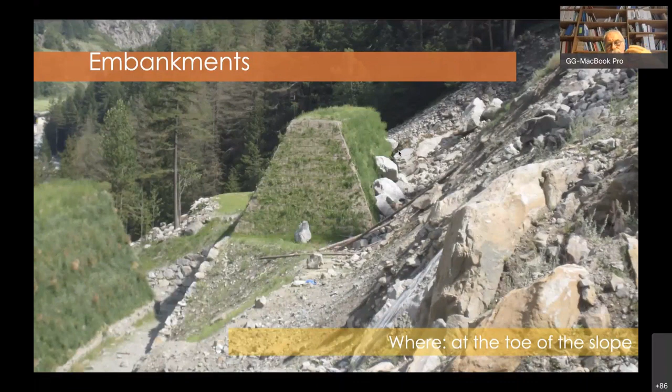A similar solution to the rockfall barriers are the embankments. They are installed as well on the bottom of the slope, far away from the detachment area. But the solution is the same, and the calculation approach is more or less the same.

After that, we have another family, another group of solutions, which is the simple drapery — that is a mesh applied on the slope without anchors. Anchors are applied only at the top. So the main components in this case are the drapery, the top longitudinal rope, and the top anchors. These are the main components. After that, we can insert some intermediate rope, or at the bottom another rope, and so on.

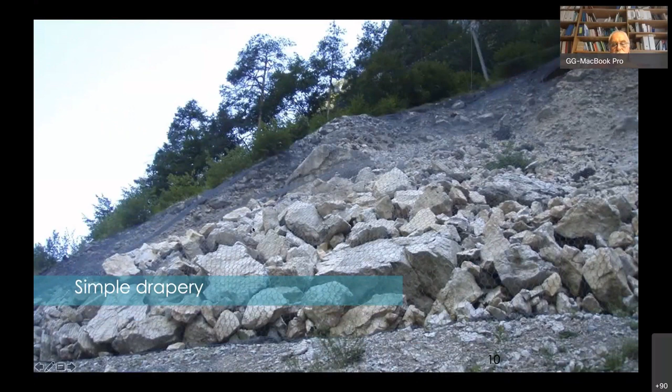But obviously, we can apply this type of intervention on the detachment area — let me say, mainly on the detachment area. Sometimes we can apply it also in a different position, for instance where there is the run-out zone with a lot of debris. This is an example of simple drapery. As you can see, it is quite an effective solution, fit to catch debris of large size. Some blocks in this slide have a diameter close to 1 meter.

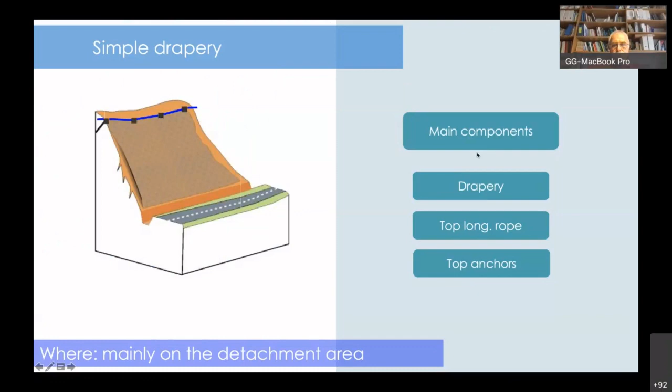But most frequently they are used for small blocks. Moreover, we have secured drapery. What is the secured drapery? It is like the simple drapery plus a pattern of anchors which stabilize the slope in cooperation with the mesh. So the main components are meshes, anchors, and cable netting. This type of installation is done on the detachment area and can typically be used on a rock face, but also on a steep soil slope, like soil nailing.

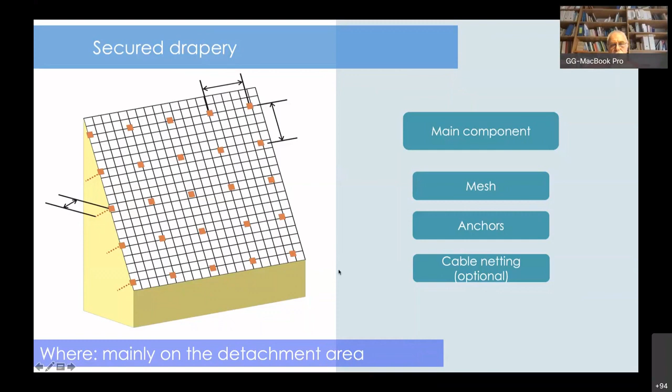We will see which are the main steps for the calculation, without going into the problem deeply. This is the typical installation. As you can see, we have the mesh, the raster of anchors, and additionally in this picture we see there is the cable netting overlapped on the mesh. This cable netting is very useful, really helps the effectiveness of the intervention, because it keeps down the mesh and distributes the forces, transferring the forces from the mesh to the anchors.

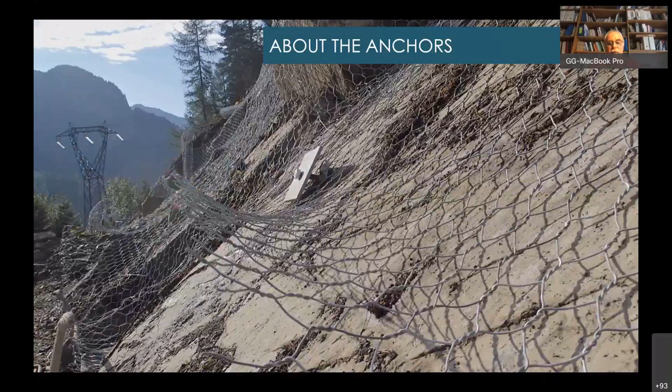But we have the opportunity to speak in a better way now. Second issue: on the detachment area, now we go deep on the meshes. I won't go too deep because it is quite long, but just an overview. We have meshes and anchors all together. Meshes and anchors means they have to cooperate, and this is a problem — we have to understand how to calculate this type of cooperation.

First, we have to say which type of anchors we are using. Typically, on the rock face are used tie-back anchors, like this one — bolts, or nails, dowels, anchors. The name could be different. But anyway, which is the difference between these?

The tie-back anchors transfer the forces from the head down to the foundation. This segment is free and transfers the forces from head to down. The same is true for bolts, but the foundation is very small, and the foundation can be slightly tightened, and after that the bolt can be grouted.

Usually in the rock face, for the intervention we do for practical reasons, and let me say also for effectiveness of the solution, we use this type of intervention. Here we have the head with the plate, but the foundation is continuous. The steel bar is grouted for its entire length. So in this case we cannot pre-stress the anchor, and this means this is a totally passive solution.

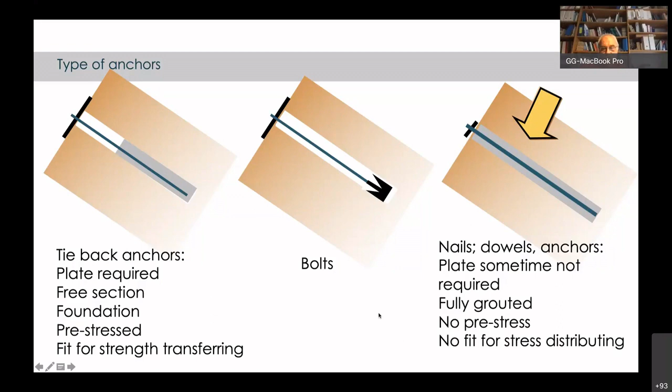Here we have an active solution on the tie-back and bolts. We have active because they develop force before the displacement takes place. In this case, no - the displacement takes place, and after that the nail can develop a force as a reaction. This definition is typically taken from the Bible of rock mechanics, from Hoek and Bray, that says the anchors cannot be tensioned, and hence must be installed before significant deformation of the rock mass has taken place.

So, I repeat, we are working with totally passive intervention. What does it mean, passive? It means that even if we, in a certain way, pre-stress the anchor - that is, we screw down the nut on the plate - we don't develop this type of pressure. It's impossible. Basically, we do a short circuit of the forces, and no pressure is developed on the sliding plane.

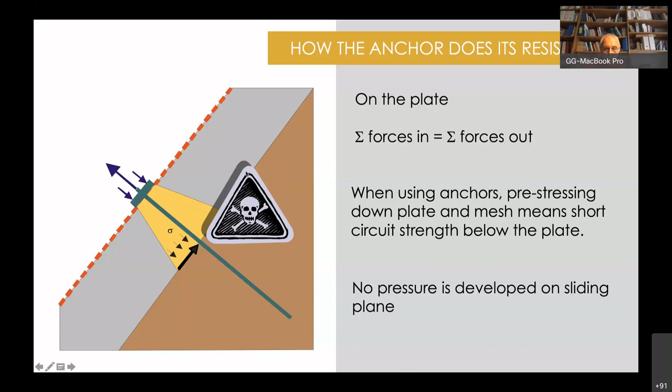What type of anchors are used? There are a lot of anchors on the market, but the most important feature is they are corrugated. Don't use a smooth surface if you have to do some work. Why? Because they don't have significant resistance to the pull-out stress.

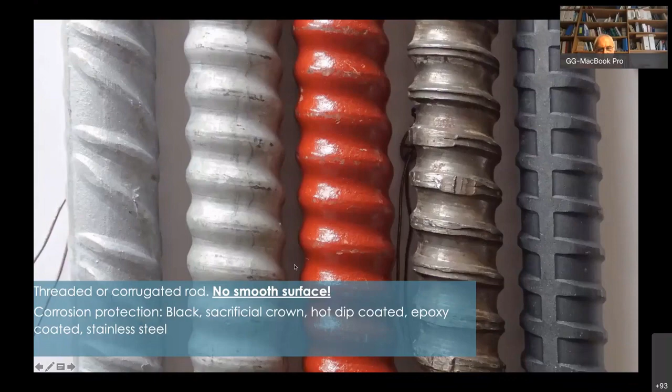Concerning the shape of the section, we have solid bar, and also in this case hollow bar. Usually this type of hollow bar is used for soil nailing operations, not in rock, even if they can be used also in rock, but usually we use solid bar.

The calculation of the solid bar is done considering also a crown of corrosion - let's say 2 millimeters - just to take into account that there will be, in the lifetime of the bar, a reduction of its resistance on the tracts where there is water circulation.

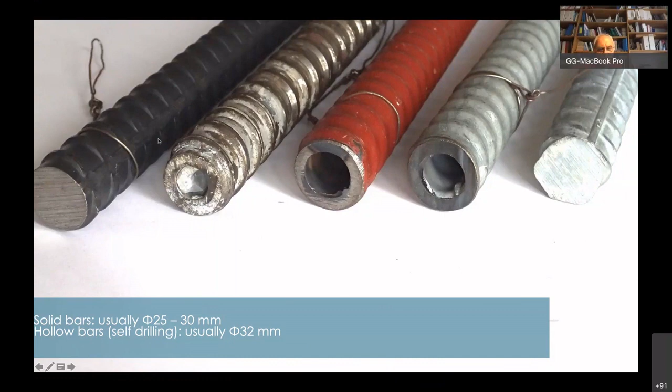In which way is the grouting done? The grouting is done directly by means of a pipe that reaches the bottom of the hole, and the grout rises into the hole up to the mouth of the hole.

Usually the grout is made with cement and water. The ratio between cement and water is, more or less in weight, 0.5. There are also some additives to increase the resistance of the cement and prevent shrinkage of the grout. Resin can also be used.

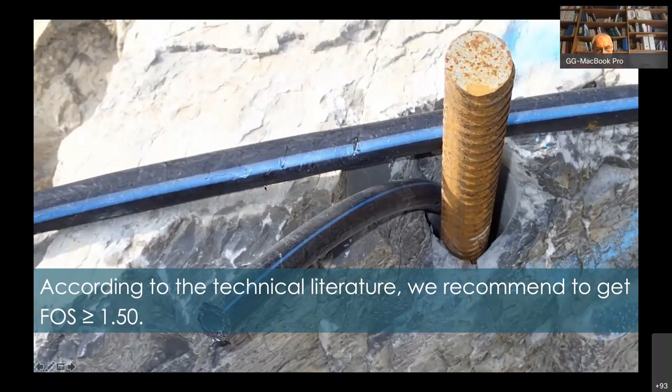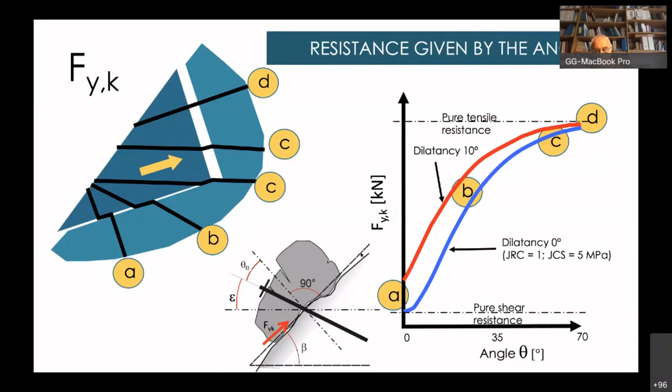Meshes. We have several types of meshes. We know that the meshes have to catch what is moving among the raster of anchors.

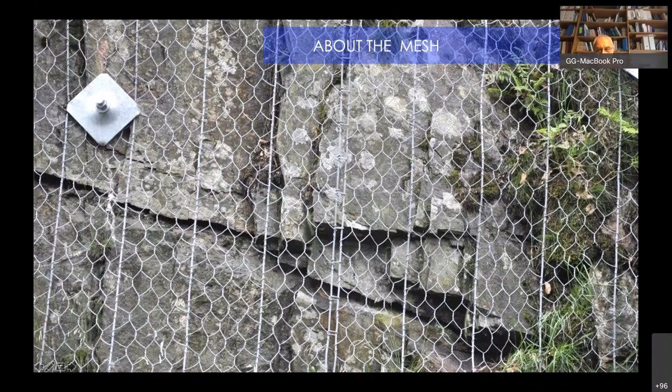We have to watch what really happens in the field. In the field, we see that even if we put the mesh in contact with the ground, on the surface, there will always be space between the plane of the mesh and the surface. Moreover, we can easily lift the mesh, even if it is a very strong mesh. There is no problem lifting it.

That is what experience says, and physics also says, that the mesh, being a membrane applied on the ground surface, can only develop tangential forces. No force can be developed by the mesh perpendicularly to the ground surface.

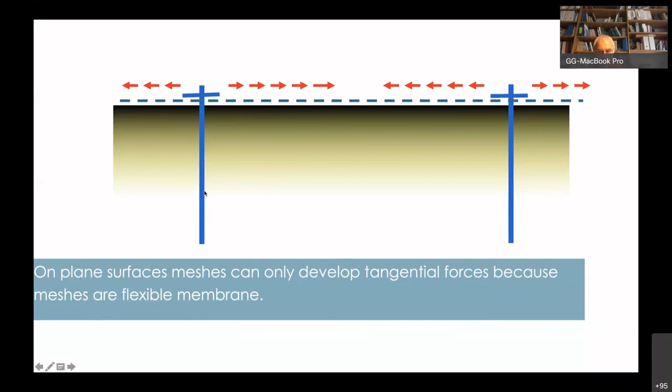In other terms, if we put the anchor down in a depression, in a concavity of the ground, we can create a sort of dome, which from the theoretical point of view can develop forces at pressure.

But in reality, what happens? Because we have a very large deformability of the mesh, this force will be negligible, absolutely negligible. And if you go to this position and try to lift the mesh with your hands, you can do it. You can lift it.

How can we know the properties of the meshes? With tests. Basically, there is the UNI test, an Italian standard, and also the ISO test, another standard. These ISO and UNI tests are equivalent.

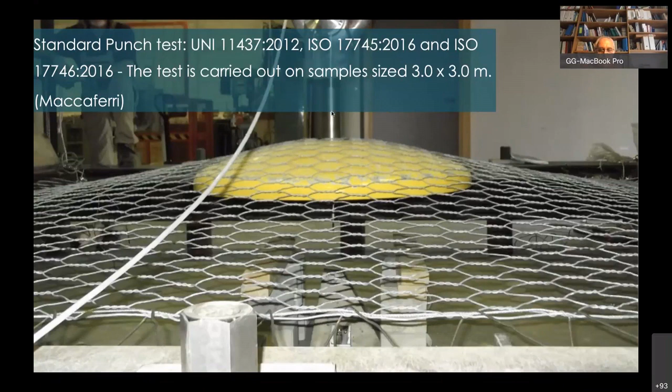And the test is done moving the shield, which has a diameter of 1.5 meter - in this case it is a small one, but according to the standard it is 1.5 meter. The test moves the shield with a velocity of 2 mm per second.

After that, another important property of the mesh is the tensile resistance. There are several standards for this type of test: standard UNI as well as ISO, which are quite similar.

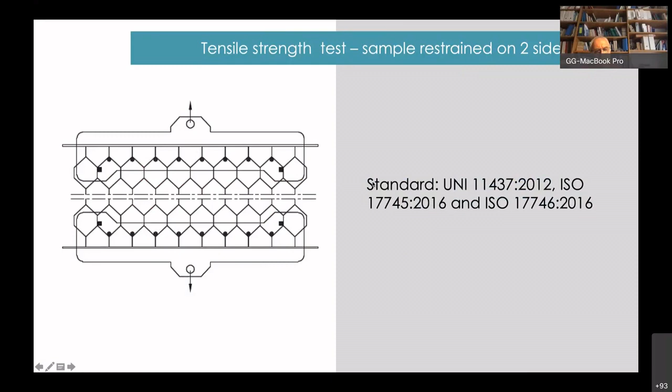Which is the tensile resistance? I won't go deeply into this matter, but it could be very interesting to understand the procedure of testing in order to also understand the limit of each test.

Anyway, we see the range of meshes going from, basically, this double twist reinforced with cable has a resistance of 60 kilonewton per meter - this is wrong, it's missing the meter unit.

And HR30 with cable, where the reinforcing cables are inserted every 30 centimeters. The tensile resistance is 177, almost 180 kilonewton per linear meter.

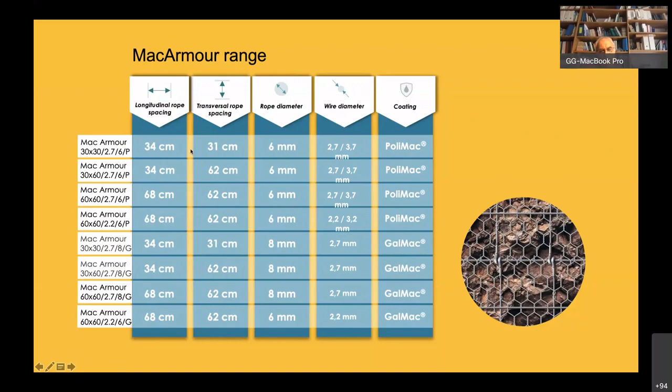Which is the logic we have to use to calculate the cooperation between anchors and mesh? This is the question. Now, the logic is that we should use a finite element method analysis because we have different types of objects that cooperate together. But the use of this approach is basically nonsense on the slope, because we don't have time to develop the calculation, we don't have enough information. Many times we are forced to develop in an emergency situation a quick solution. So we have to use limit equilibrium, or analytical method.

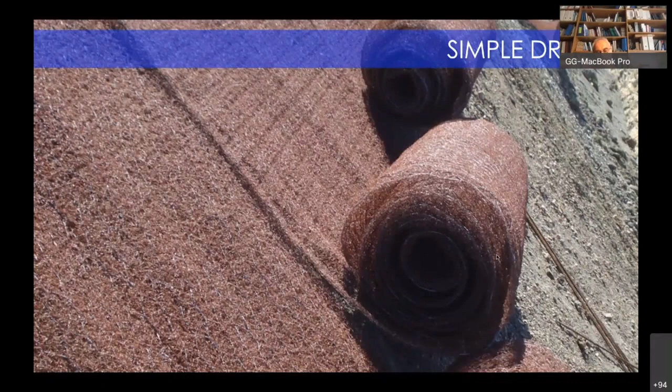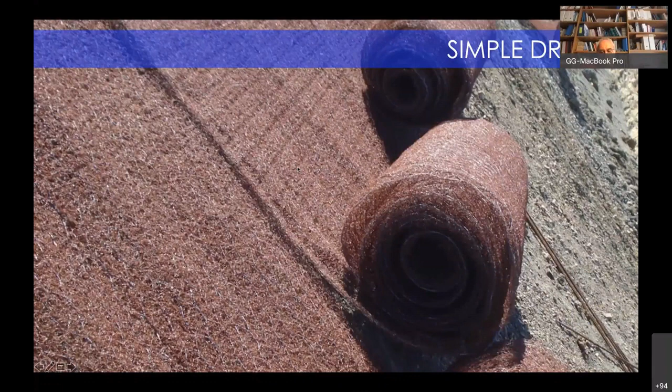So they have different purposes, the whole slope anchors, and the small portion, the mesh. With this approach, we can understand the forces against the mesh, and the forces against the anchor, and after that combine the two forces, taking into account the resistance that we know on the basis of the lab test. In order to explain all the steps of this calculation, it would take, I'd say, some hours, and we cannot go deeply into the matter. After that, we go very quickly over the simple drapery.

Simple drapery means, as we have seen, mesh applied on the slope. In this case it's a mesh plus mat, anti-erosion mat. The calculation principle is this: we have the mesh on the slope, and the mesh keeps stabilized at the bottom a portion of debris. So the anchor on top has to keep the weight developed by the mesh itself and the pocket of debris at the bottom.

Plus, if there is the condition, I think in some places in the Himalaya, there is also snow, a layer of snow. And so at the end, the anchors have to hold and stabilize all these portions, and the mesh also has to withstand these forces: load of debris plus load of snow plus weight of the mesh itself. The tensile resistance of the mesh must be greater than these loads. This is the principle of calculation.

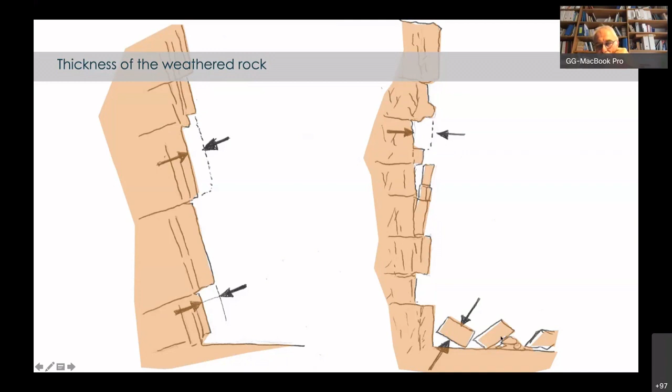Some cases just to understand: here we have a thin layered limestone slope. Which is the size of the blocks? Usually it is related to the head of these layers that move out, and the thickness is maximum 0.1 to 0.2 meters. If there are large blocks like this one, we know that these blocks must be scaled, or here we have to reshape the slope. So the mesh cannot account for this, the mesh is not aimed to catch this.

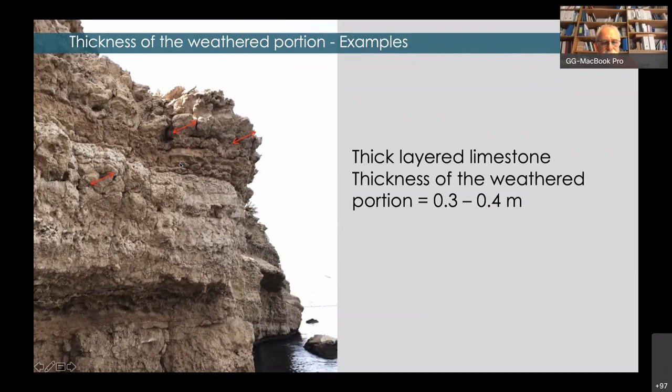Another situation. In this case, we have several blocks, a small portion of blocks. We are in front of the sea, this is the Indian Ocean. We have several blocks, very, very small, but also large blocks, especially on the crest of this cliff, a small cliff. We have blocks with a size of 0.3, 0.4 meters. Just to give you the idea of the problem.

In this case, with this type of thickness and size of blocks, the anchors start to be very, very important, because the mesh cannot stabilize itself. The mesh cannot stabilize this type of blocks. The anchors are absolutely necessary.

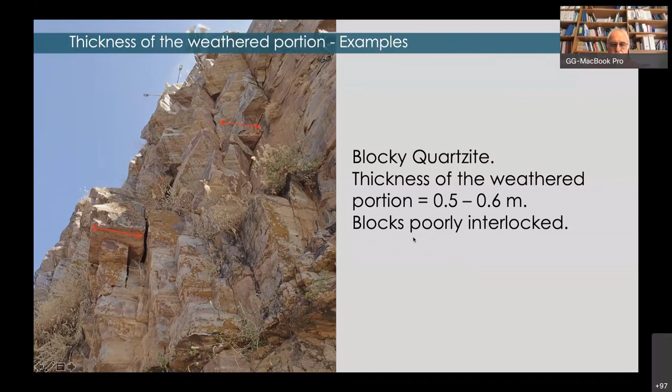We can recognize also a different condition. In this case, we have toppling, some toppling and sliding of the joints. So the prevention or control of this type of instability is very, very problematic. And I repeat, anchors are always needed in this condition.

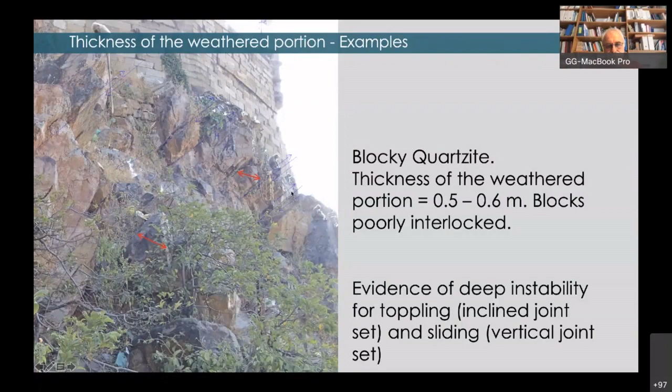Another matter, another type of problem. Here we are on some Indian highway, I don't remember which one, to be honest. As you can see, in the picture it's not clear, but there is a large crack, a sequence of cracks, that give the chance for this portion to collapse. The size of the blocks is very, very large—we are speaking of 3-4 meters by a couple of meters, so the blocks are not at all small.

We can operate with meshes in this condition just for the small blocks, not for the large ones. Moreover, if we want to stabilize this slope, we have to reshape it first, and after that operate with deep anchors in order to stabilize the large blocks, which have a size of several cubic meters, and after that apply the mesh. So the larger the blocks, the more complicated the solution. We always have to keep in mind the limits of our possibility with meshes.

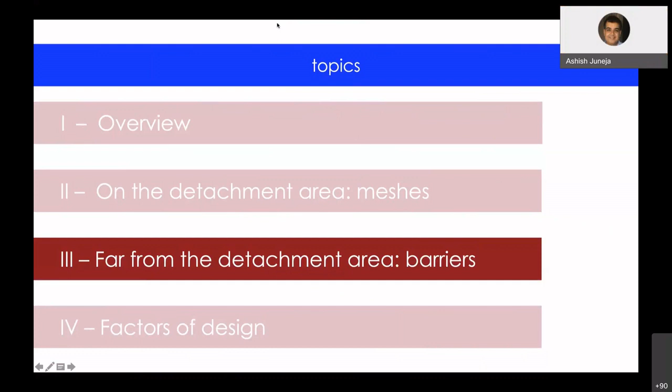Okay, I think if there is any question, we can shortly stop and answer, otherwise I go ahead. Yeah, okay, there are, in fact, Giorgio, two questions. Yeah, okay, I'll just pull them up. I can read them for you. Yes. Second, please.

So the first question is by Mr. Gaurav. I think this question was when you were presenting about the grouting, the grout which went in. So the question was, how much pressure is generally used for the grout? Okay, that is the first question. I'll answer now.

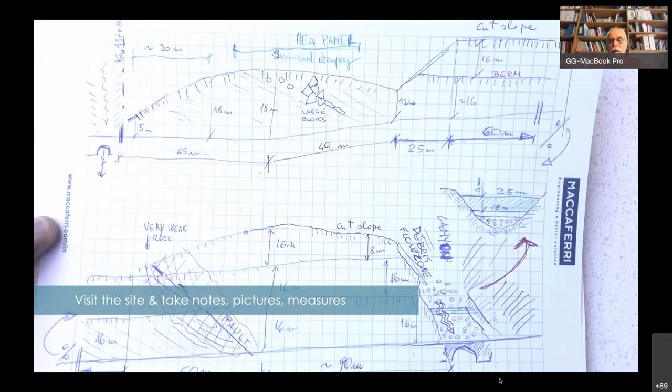Usually there is no pressure because they are short. There is no pressure, only the pressure of the fluid, only gravity. They are not in pressure with, let me say, 1 atmosphere or MPa of pressure. No, nothing. Only gravity. The gravity is on the pipe, and the grout is completed when the cement comes up on the mouth of the hole. That is all.

Okay, so the second question is from Mr. Mayuresh Bukhare. He has appreciated this presentation, says it's very informative, but he has a doubt regarding the design life of rock slope protection work. He asks, does the weathering of the rock, which is a continuous process, also limit the design life of this slope protection work for the current state? If you have a design for the current state, does the over-designing take into account the future depth of weathering, if possible? And if so, how can one judge the future depth of weathering?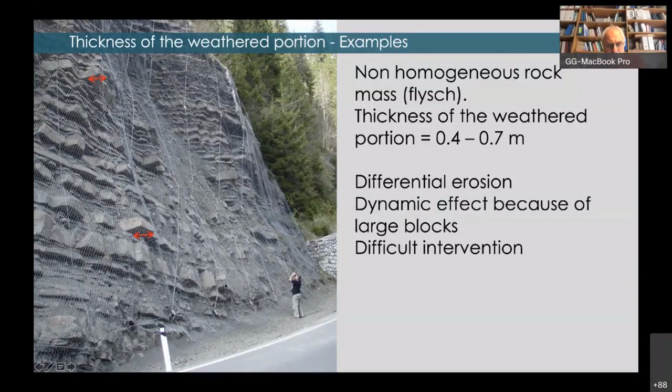Okay, so there are in fact three more questions. You want to take them now or maybe towards the end? We can go at the end. How long, how much time is available? It depends upon the patience of the audience. In case the number of participants reduces drastically, I think it will be the time to stop, but okay, now it's still okay - people still have patience.

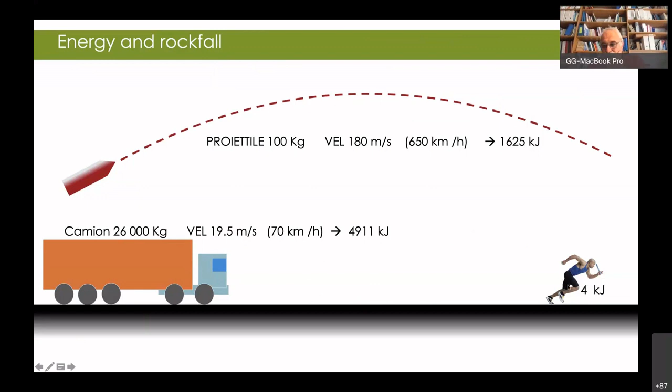Okay, very quickly, barriers. The barriers have to catch energy, not force - energy. What is the energy? The energy depends on the velocity and on the mass. To give you the idea, a projectile of 100 kg with a velocity of 180 meters per second gives an energy of 1,600 kilojoules. A truck moving with 26 tons at a speed of 19 meters per second, 70 kilometers per hour, gives more or less 5,000 kilojoules. Usain Bolt has an energy of maximum 4 kilojoules. To give you the idea, with a speed of 90 kilometers per hour, a mass of 16 tons gives 5,000 kilojoules, and 10 tons gives 3,000 kilojoules with a free fall of 31 meters.

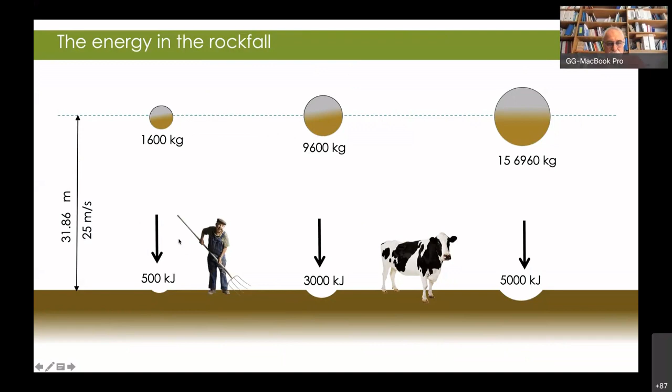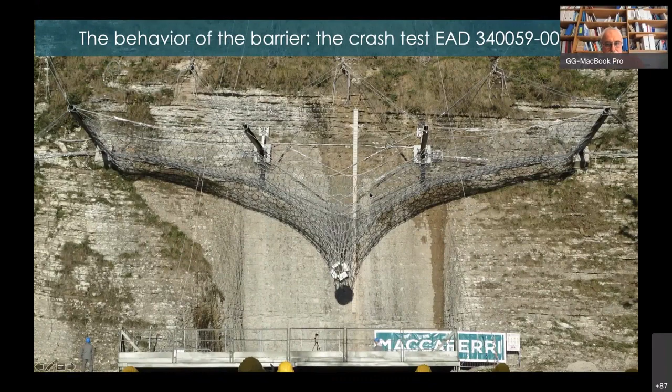How do we know the capacity of the barrier? We know it because the barriers are tested with crash tests. The crash test gives us the capacity of the barrier in terms of energy, residual height, and deflection - deflection meaning the elongation of the barrier after the impact - as well as forces on the anchors. One additional piece of information is the behavior of the barrier at the maximum energy level and at the service energy level. The service energy level is when the barrier is stressed with 1/3 of the maximum energy level. The maximum energy level is the maximum capacity of the barrier - 1 kilojoule more, and the barrier is not able, not fit, to catch the block.

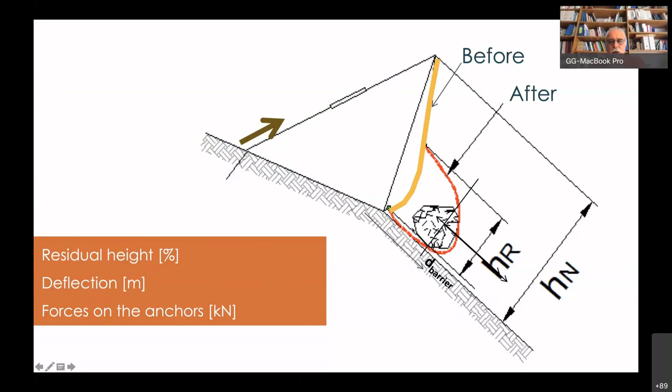I'll go with very fast information. This is the barrier before and after the impact. This is the nominal height of the barrier, and this is the residual height. After the impact, we have the residual height because the barrier deforms.

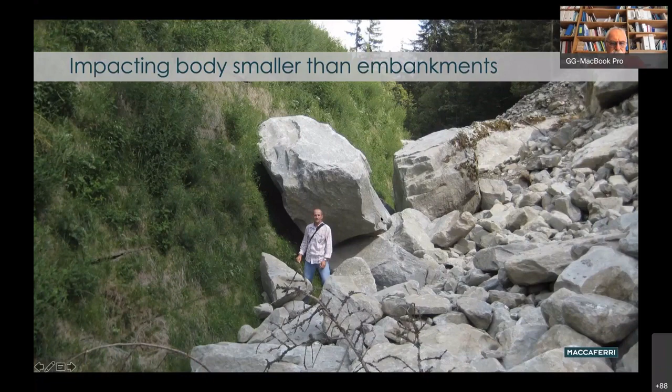I'll skip this and go on to the embankments. The embankments are like a barrier, but they have a different behavior. They are fit to resist very large impacts without deflection like the barrier. So here you have the idea of the blocks, which is the difference between barrier and embankments. Here you see the difference.

So the embankment is absolutely better than the barrier. Which is the problem? The embankment requires a foundation. So if there is no room for the foundation, we have to install a barrier. Or if the slope is too steep, we have to install a barrier.

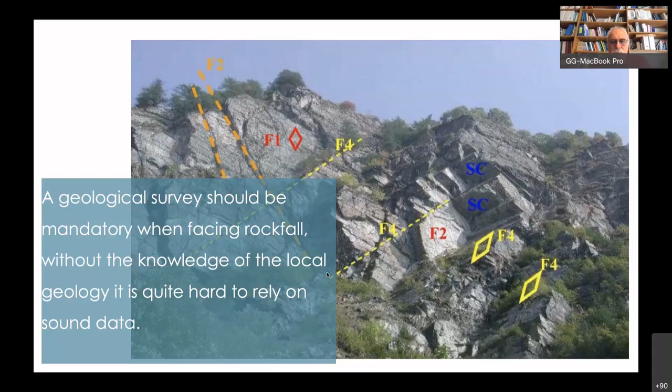I'll run down the factors of design, how to take the decision. Sometimes it's not at all easy to decide about the best solution we have to install. First, we have to do a good geological survey, good geomechanical survey, in order to acquire information about the slope. It's obvious, nothing new, but sometimes it's not so clear.

Why do I say this? Because there are several types of instability, and for each type of instability we have a different type of solution. Here, for instance, double twist wire mesh is enough. Here, panel, cable panel, HEA panel would be enough. Here, more anchors, strong mesh like panel. In this case, imagine a very large height slope, let's say 20 meters in this situation. We need deep anchors, we have to stabilize the entire slope. Mesh, yes, we have to apply mesh, but the mesh can catch only a thin, small portion.

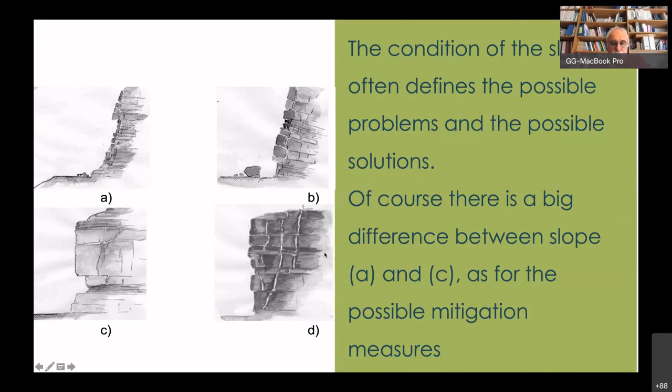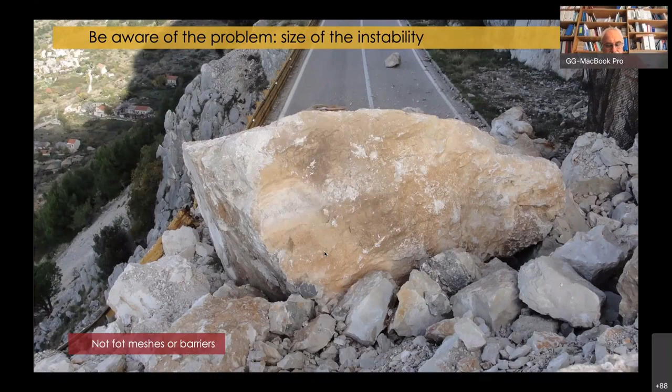This is not a solution for mesh, it's evident, no? This is a problem for deep anchor and deep stability, maybe tie-back anchors. Sometimes we have very big, very large blocks. In this case, no anchor, no tieback, no mesh, nothing. This is not a problem, this is a data, a fact that we have to accept as it is. Stop.

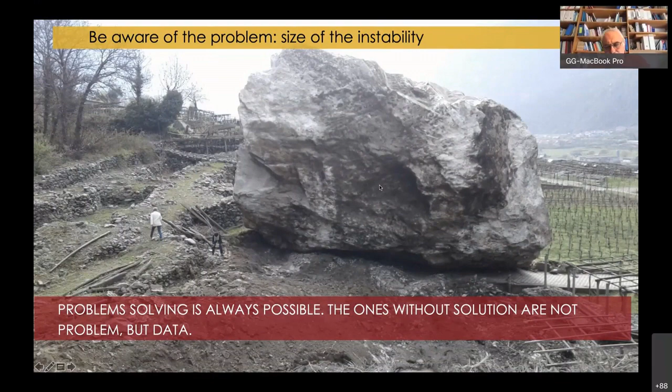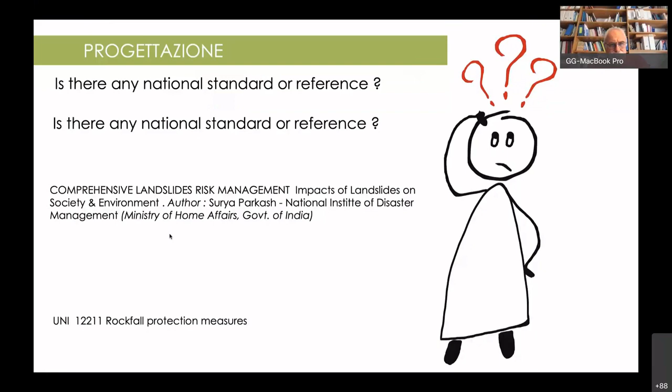Especially if the detachment zone is far away on the slope, we have to consider the national reference. I know there is some standard in India, but I didn't find it. Sorry.

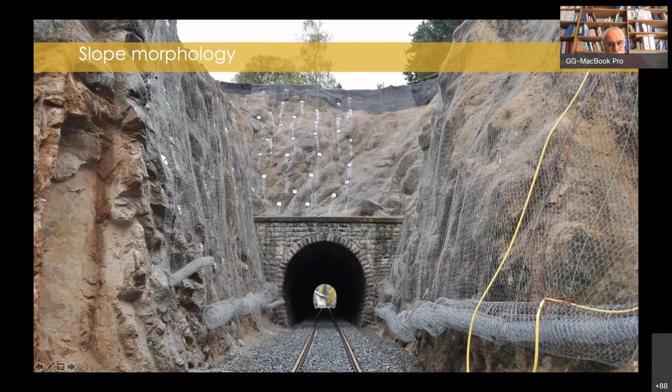After that, how to choose the solution - we have to take into account the risk, let's say the frequency of the events. In a slope we have a lot of small blocks that can generate damage on the road, and one very large block. The frequency of falling is 90% related to the small blocks, one block only gives 10% of risk. So if I insert a solution just for the small blocks, I preserve the road from 90% of the risk. That is, if I insert a barrier for small blocks, in this case I save the road. Maybe when I have money, I can do a specific intervention for this one also.

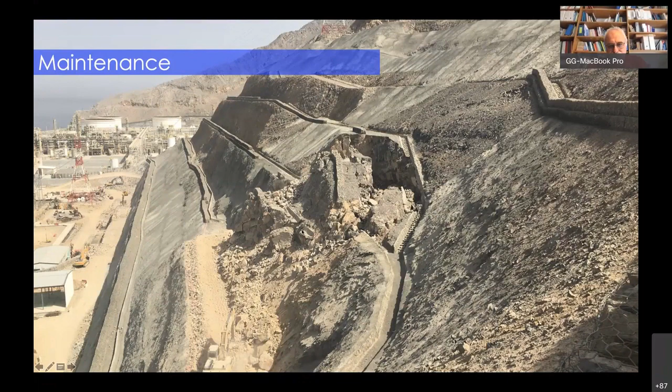Just to note the problem of barrier performance: if we are in a situation where we place a barrier above the portal of a tunnel, that's a delicate position, because people coming out of the tunnel cannot suddenly find a block on the road. So we must be safe, and no maintenance is possible there, or we must reduce maintenance drastically. In this condition, we have to use a barrier that works at its service energy level — an oversized barrier, in order to reduce its maintenance.

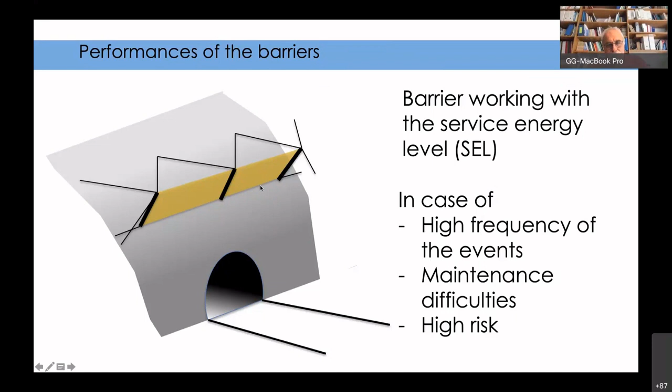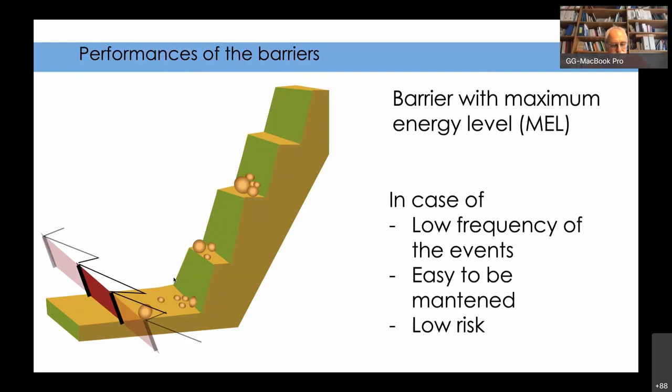But if the risk is well accepted, typically in a mining area, we can easily use a barrier that works at its maximum energy level. This way I minimize the cost per unit of energy — I can catch the block and I don't care if the barrier is destroyed or not, because maintenance isn't a problem for me in this situation.

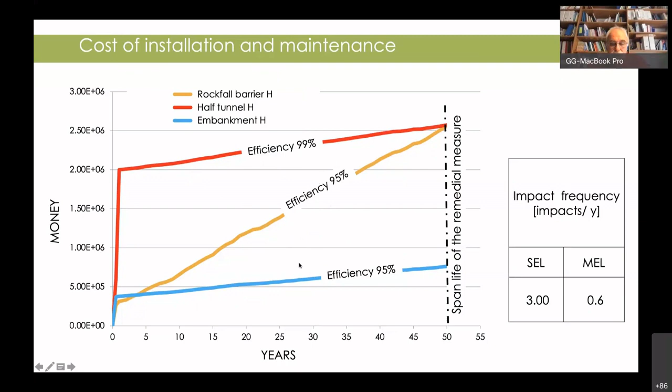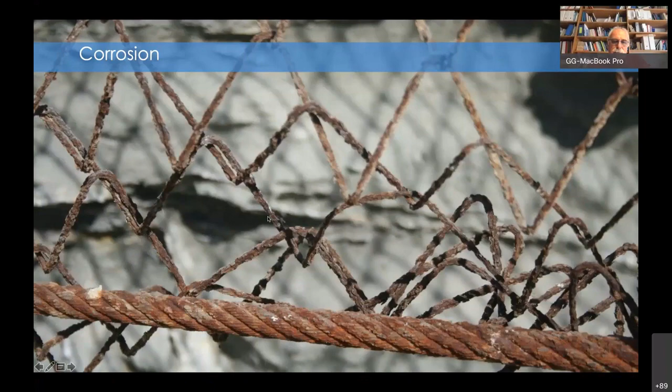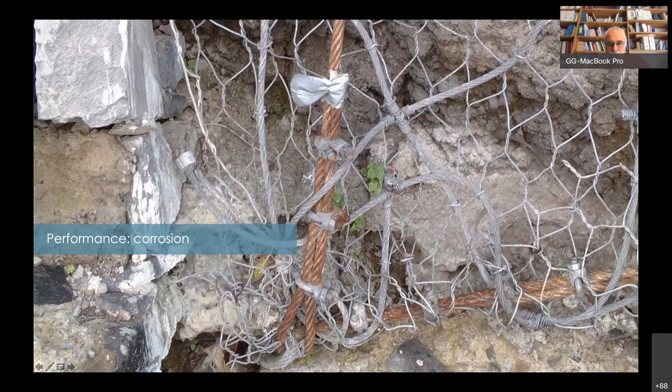Other matter concerning maintenance: we have to watch the performance of the barriers and of the materials more generally. Is there any problem of rusting? Rusting means less efficiency in a short time. We have to require that the material gives good performance against corrosion.

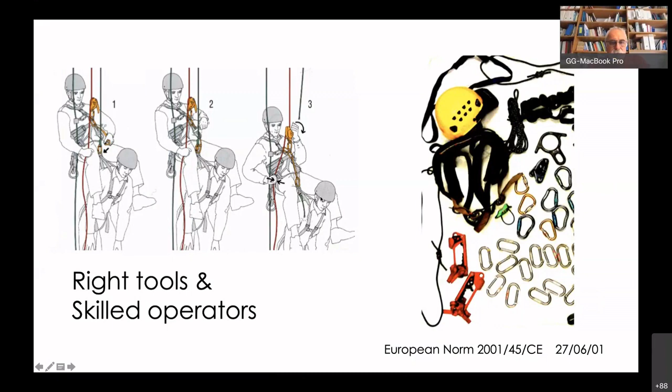Last but not least, there are several other questions, such as the skill of the contractor and of the workers. It's totally useless to develop a good project if, in the end, there's no contractor able to carry it out. That means the contractor must have skilled workers able to work in good, safe conditions on the slope.

Other matter, preliminary works — we already discussed some of this, I'll skip ahead to go faster. The organization of the work yard is very important. The first question is: how can I reach the top of the slope? Do I have an access road at the top or the bottom? Can I use a crane?

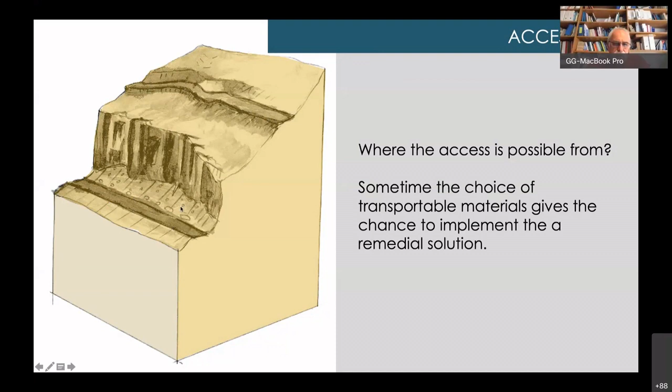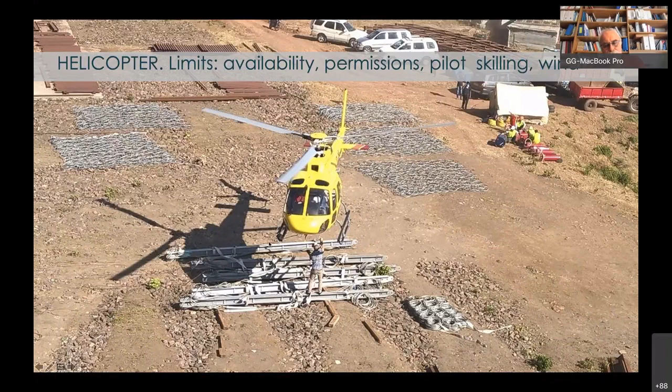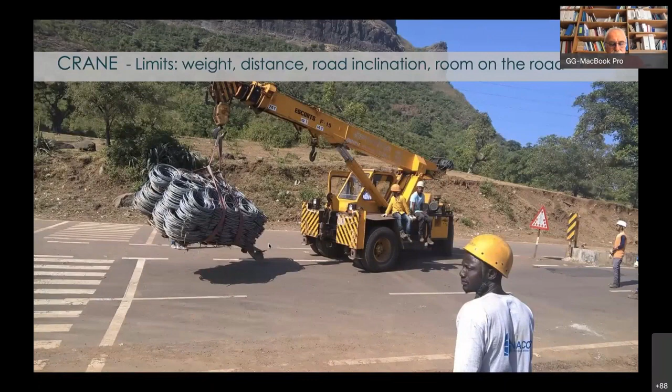Can I use a helicopter? The helicopter is a basic transport method for this type of intervention, but I rarely saw this application, for instance in India. This picture was taken in the Saptashringi temple area, where the barriers were installed using a helicopter. There was a crane just to prepare the field, but transportation on the slope itself was done by helicopter. Then there's the platform for drilling.

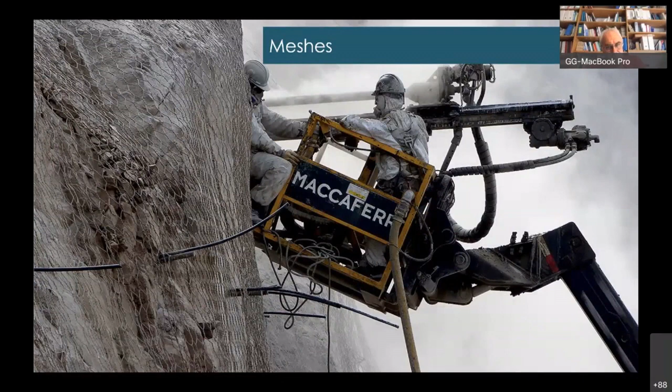Can we use a platform, or do we have people able to work suspended on a platform or directly suspended on a rope?

Finally, we must be realistic. Don't get confused in the Ray's Rule. What is Ray's Rule? I know we are on the slope. We have to design, we want to know exactly the roughness of the joint, the spacing of the joint, length, gap, and so on. Everything, compression, resistance of the rock, and so on. Many times we don't have time to do this, and moreover we don't have enough information to develop a good geological model, a geotechnical model, which is Ray's Rule.

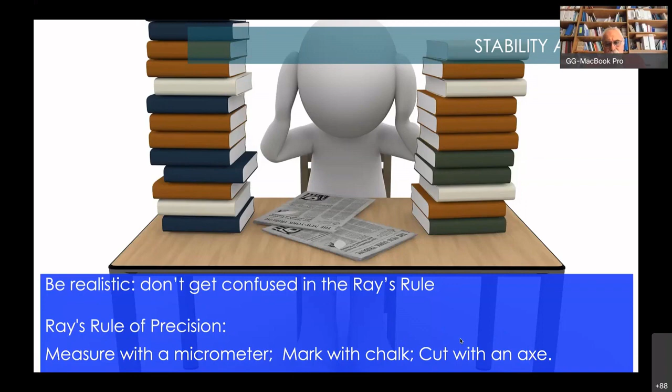Measure with a micrometer, mark with a chalk, and cut with an axe. We, at the end, are forced to cut with an axe. So all the process of the design must be realistic. We have to remember that we have to cut with an axe. I know I'm quite rough to say this, but many times we are speaking of very cheap intervention, sufficient intervention where our precision is not so required.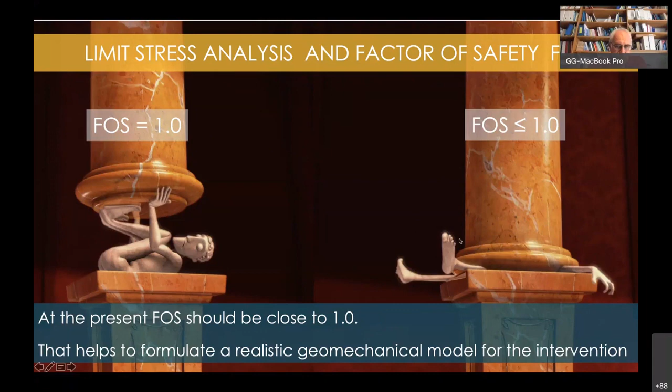And how to develop the design? We have action and resistance. We know that with our intervention, the equilibrium between driving forces and resisting forces, at the end when we insert the intervention, should give a safety factor of 1.5. And how can we do the analysis? We can develop the analysis as a back analysis. We know that at present the safety factor is at least 1, not 0.5 or 0.1, it is 1 because the slope is still there. This situation doesn't exist - if we have this situation, we have done a bad geomechanical model.

Final remark: we have to remember that a good intervention cannot be cheap, good, and fast altogether. This intersection zone doesn't exist. If we have a good and cheap intervention, it will arrive too late. If it is cheap and fast, it will be ugly, and good and fast will be expensive. Free basically doesn't exist, or it is garbage. Okay, this is my final slide. Thanks for your attention.

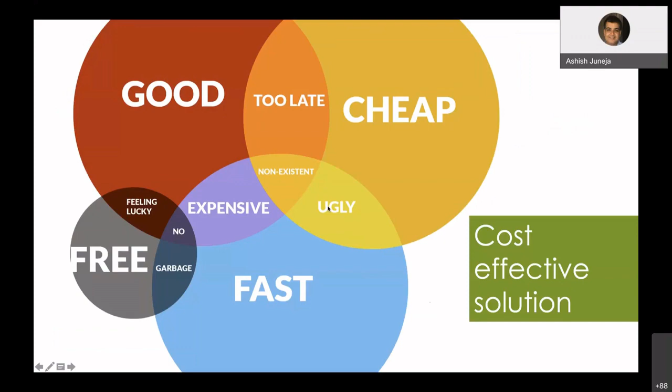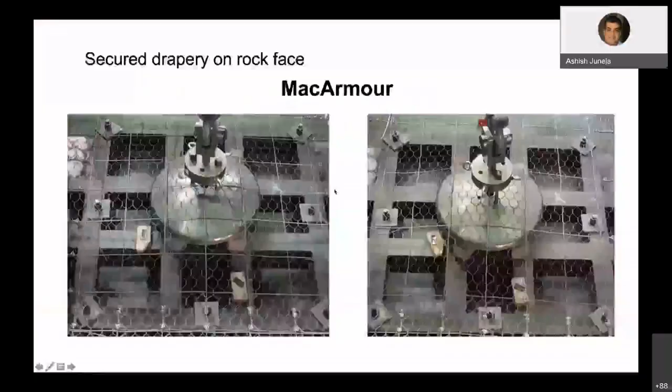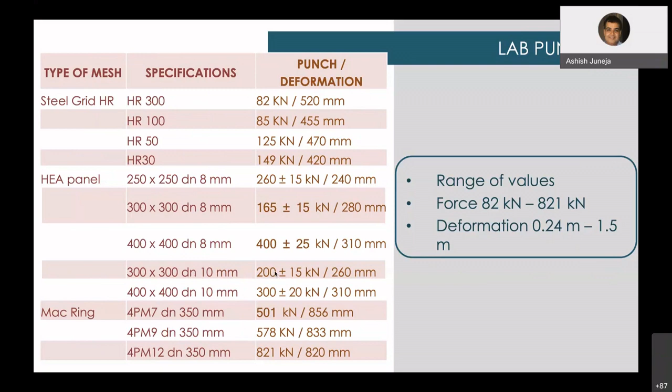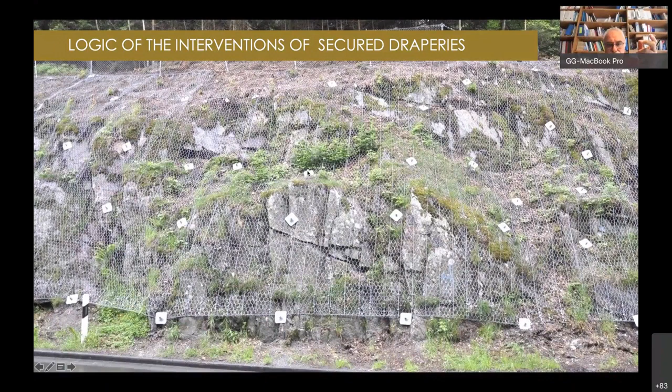This is, let me say, a small problem, but there is. If we have to protect in specific conditions some very, very important zone, let me say we are just above an overhanging slope. We have to protect the house just below the overhanging zone. We have to insert a different type of mesh, in some cases we have inserted a 2 mm mesh.

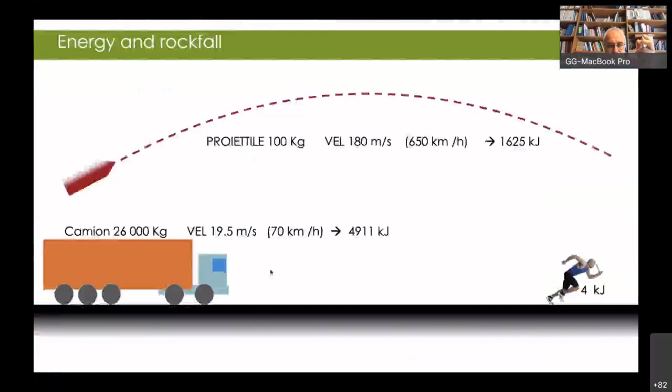Concerning the weathering, I say basically it is a problem of experience on the local climatic conditions and local type of rock outcrops, and we have to watch the rock. I can say only that in order to understand the limit of capacity of the mesh in that specific environmental condition, we have to watch the displacement of the mesh under load when there is a pocket of debris.

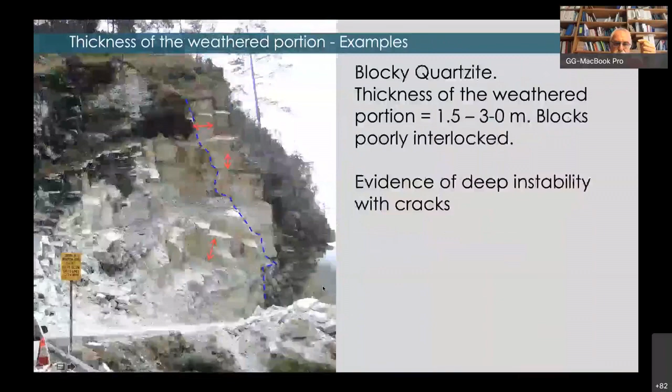We know the behavior of the mesh when it is loaded by the pocket of debris. So the design has to foresee the maximum acceptable displacement admitted by a specific type of mesh. If we know this, when we reach it, we can watch the slope and this type of displacement due to the pocket of debris, then we can measure it and say, okay, the displacement is close to alpha meter, we have to do maintenance. This is the correct process in front of this type of problem.

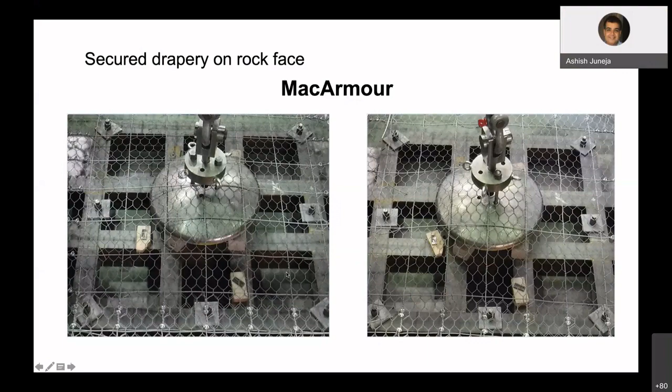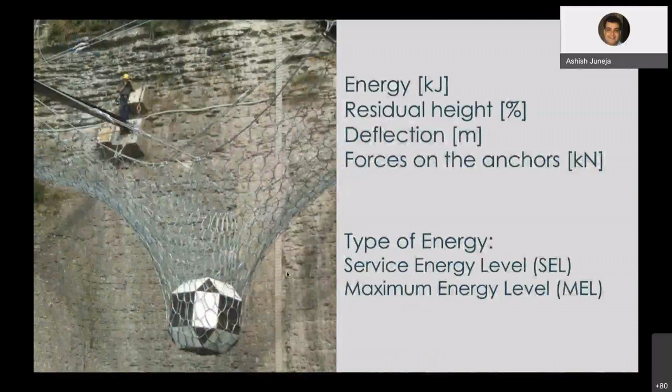There is one more question if you can take it. It's something, I think you had presented a very nice figure to show wherein you would like to use a flexible barrier and a drapery system, or a rigid control system. This question is from Bhim Yadav. This one? I think there was a table which showed the cost factor. I think this is also there. Yes, the same.

But you have to think, the approach is this. You go on site and the client asks, please protect the road from this slope that releases blocks. You have two possibilities, okay? Mesh, cover all the slope with mesh, or insert a barrier. Now, the cost of a barrier, let me say I'm speaking of euros or dollars, but could be $1,000 per linear meter, okay, for 1 meter of barrier.

You have to compare this with the height of the slope. If I have to cover the entire slope with a mesh, the cost, the incidence of the cost is, let me say, $100 per square meter, I invent, okay. The slope is 100 meters in height. You have a huge cost per linear meter, no? You have 100 times 100.